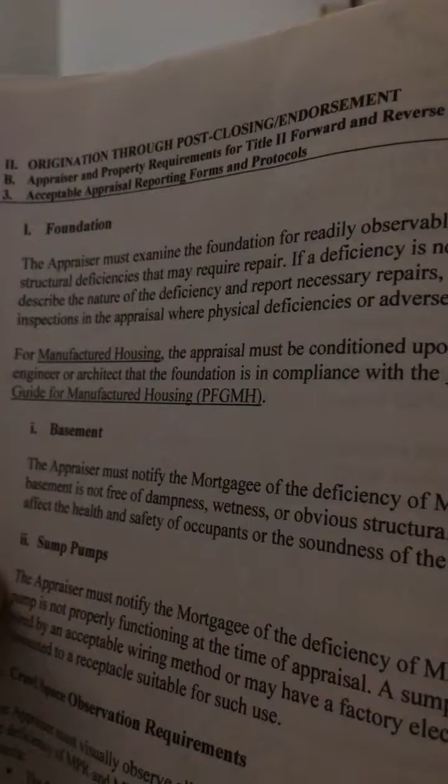FHA SFR Appraising Handbook 4000.1, page 38.

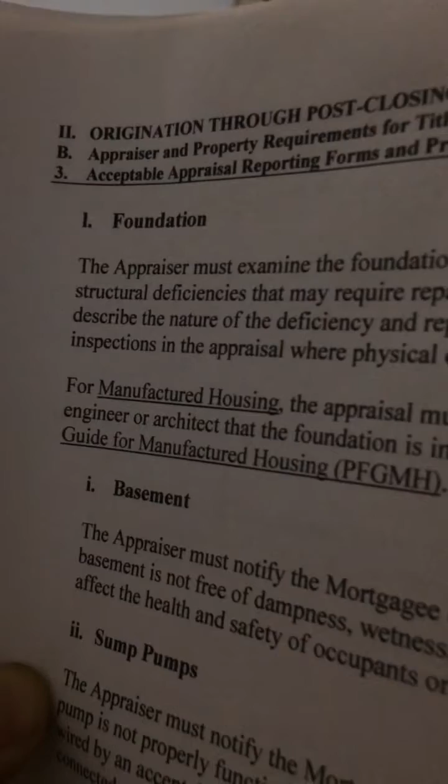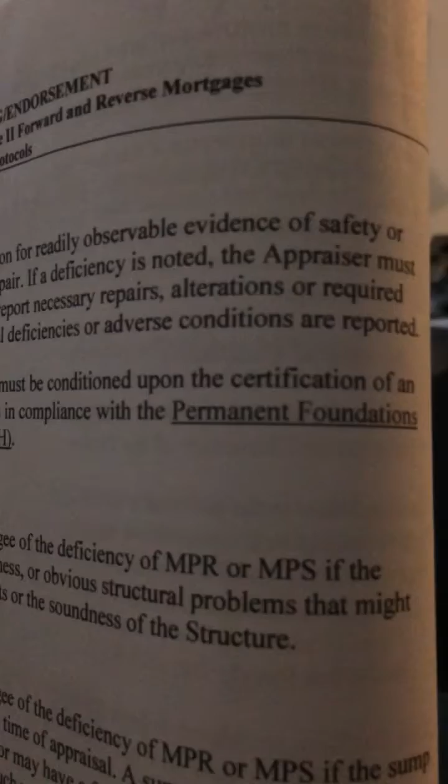Foundation. The appraiser must examine the foundation for readily observable evidence of safety or structural deficiencies that may require repair. If a deficiency is noted, the appraiser must describe the nature of the deficiency and report necessary repairs, alterations, or required inspections in the appraisal where physical deficiencies or adverse conditions are reported.

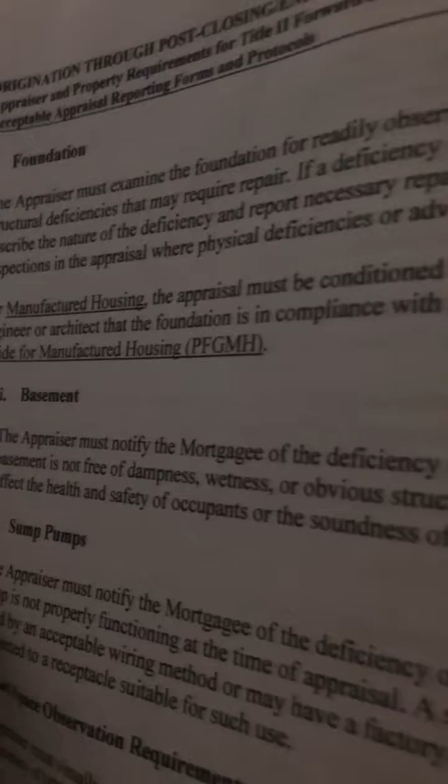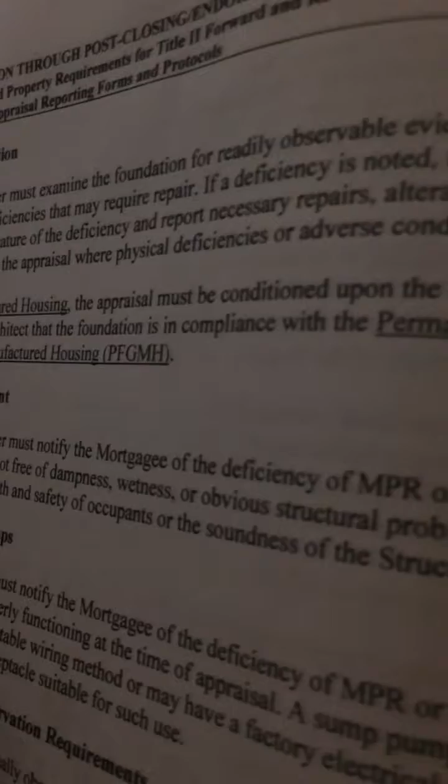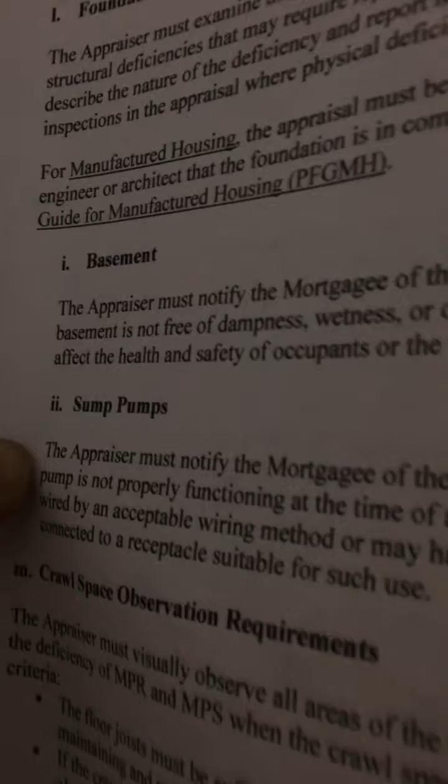For manufactured housing, the appraisal must be conditioned upon the certification of an engineer or architect that the foundation is in compliance with the Permanent Foundations Guide for Manufactured Housing, PFGMH.

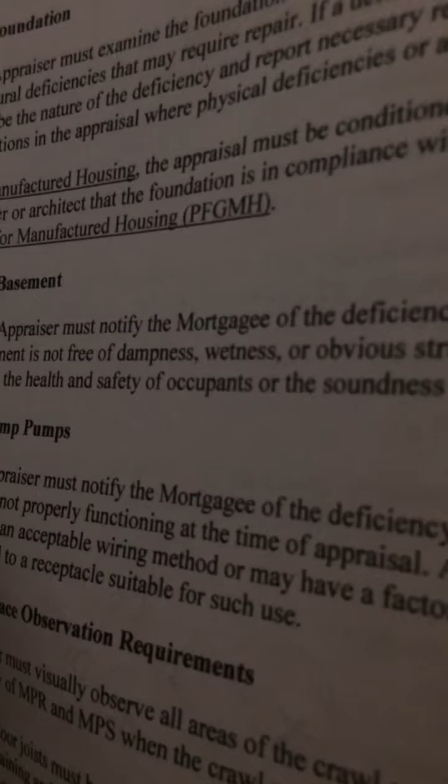Basement. The appraiser must notify the mortgagee of the deficiency of MPR or MPS if the basement is not free of dampness, wetness, or obvious structural problems that might affect the health and safety of occupants or the soundness of the structure.

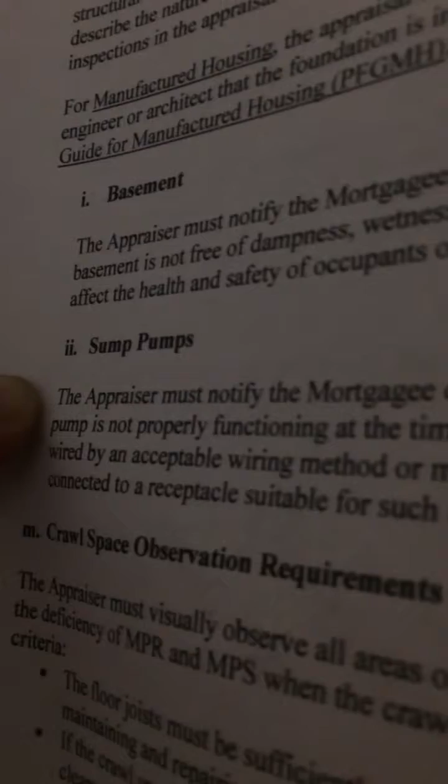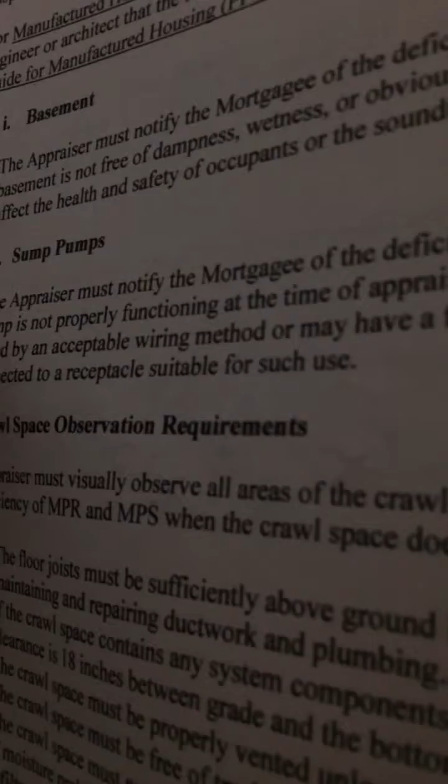Sump pumps. The appraiser must notify the mortgagee of the deficiency of MPR or MPS if the sump pump is not properly functioning at the time of appraisal. A sump pump may be hard wired by an acceptable wiring method or may have a factory electrical cord that is to be connected to a receptacle suitable for such use.

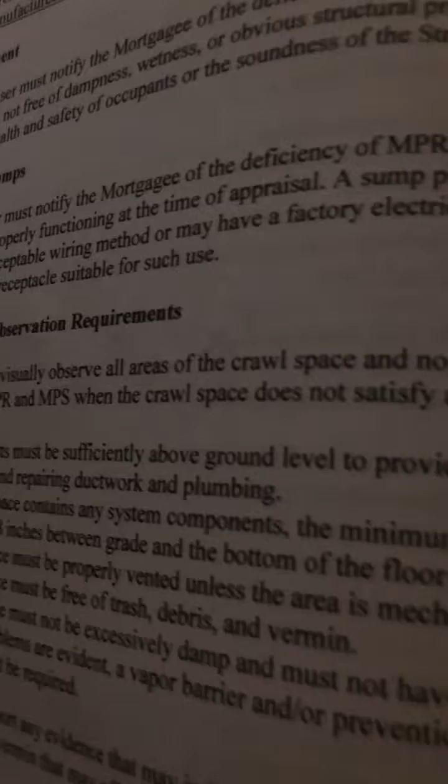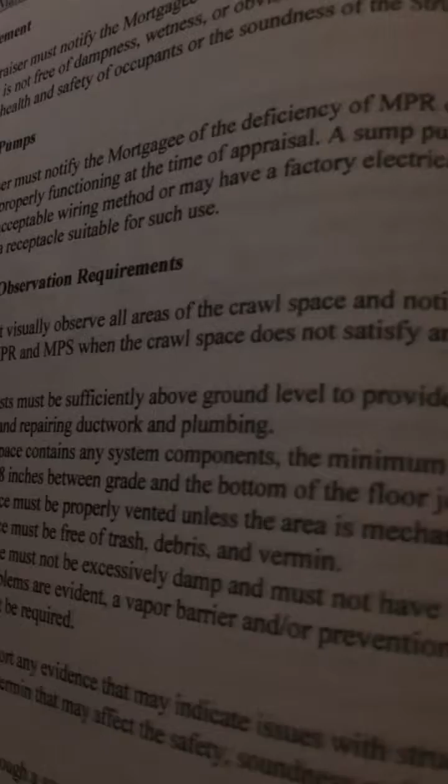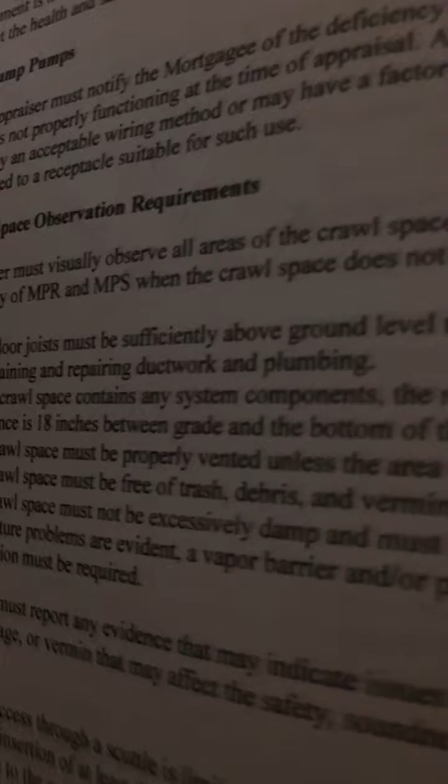Crawl space observation requirements. The appraiser must visually observe all areas of the crawl space and notify the mortgagee of the deficiency of MPR and MPS when the crawl space does not satisfy any of the following criteria. The floor joists must be sufficiently above ground level to provide access for maintaining and repairing ductwork and plumbing. If the crawl space contains any system components, the minimum required vertical clearance is 18 inches between grade and the bottom of the floor joists.

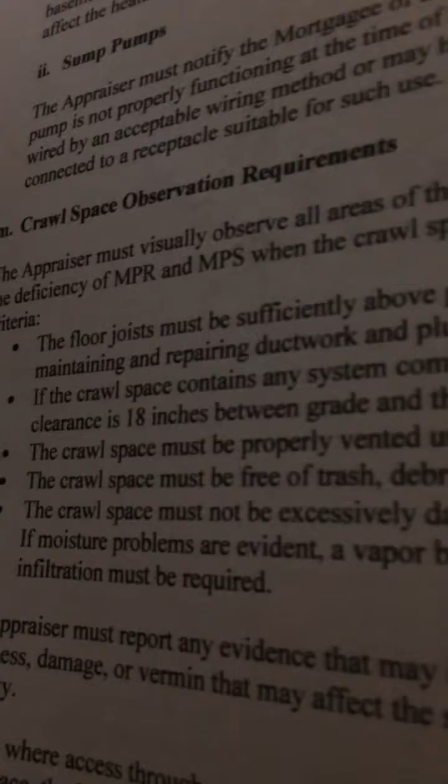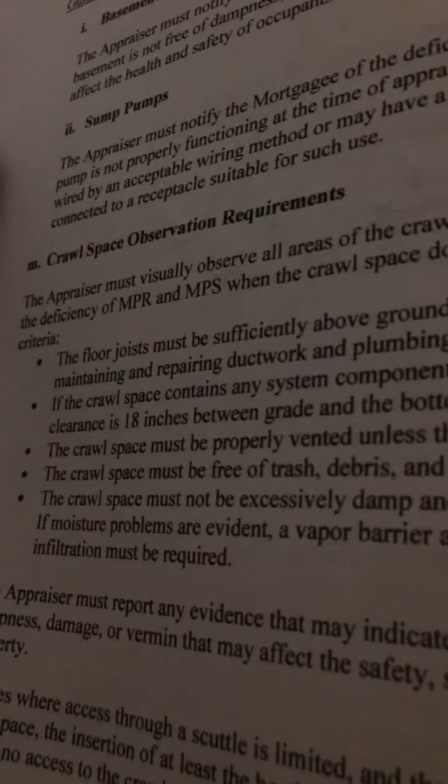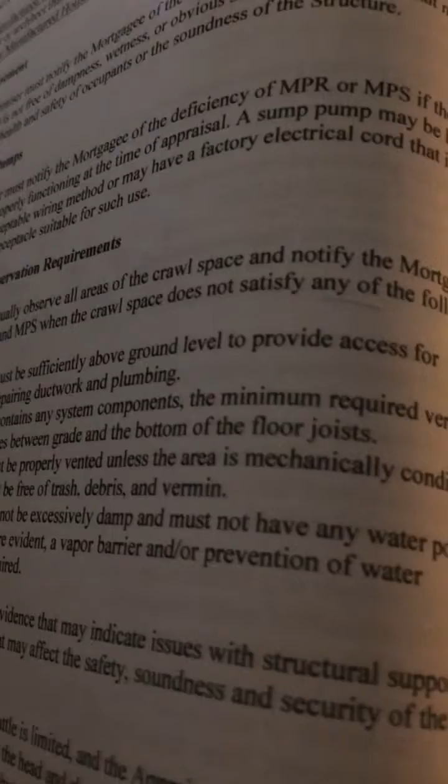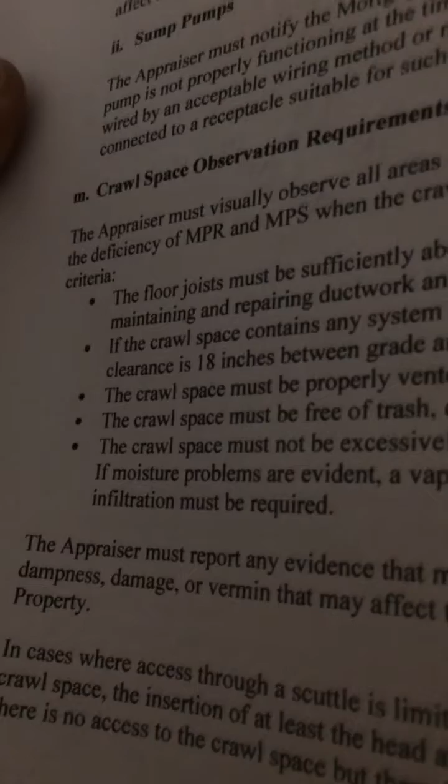The crawl space must be properly vented unless the area is mechanically conditioned. The crawl space must be free of trash, debris, and vermin. The crawl space must not be excessively damp and must not have any water ponding. If moisture problems are evident, a vapor barrier and/or prevention of water infiltration must be required.

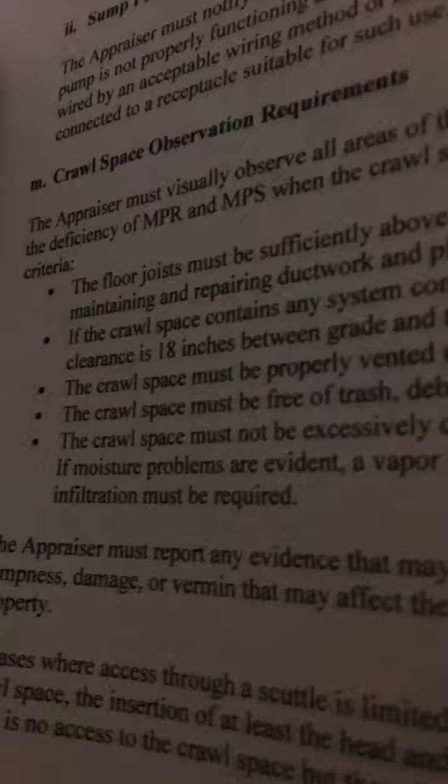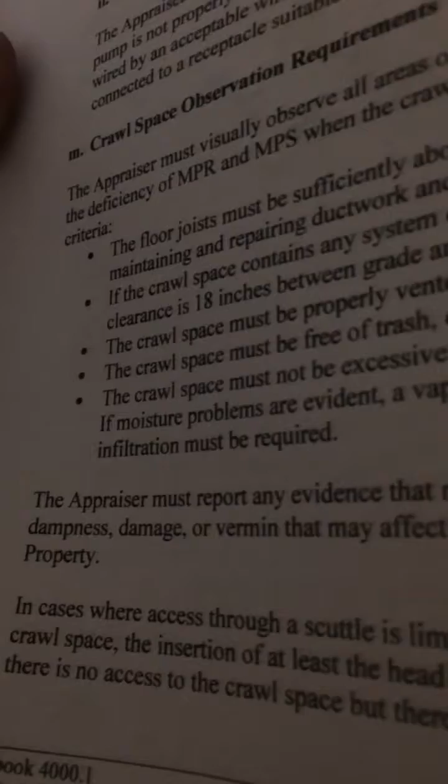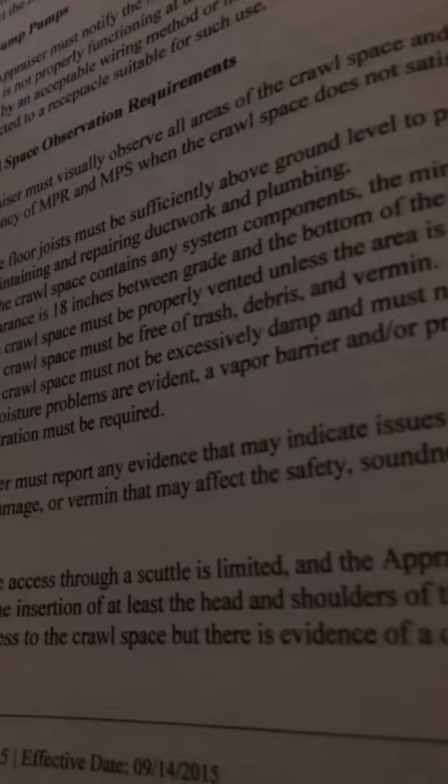The appraiser must report any evidence that may indicate issues with structural support, dampness, damage, or vermin that may affect the safety, soundness, and security of the property. In cases where access through a scuttle is limited, the appraiser cannot fully enter the crawl space. The insertion of at least the head and shoulders of the appraiser will suffice if there is no access to the crawl space, but there is evidence of a deficient condition, such as